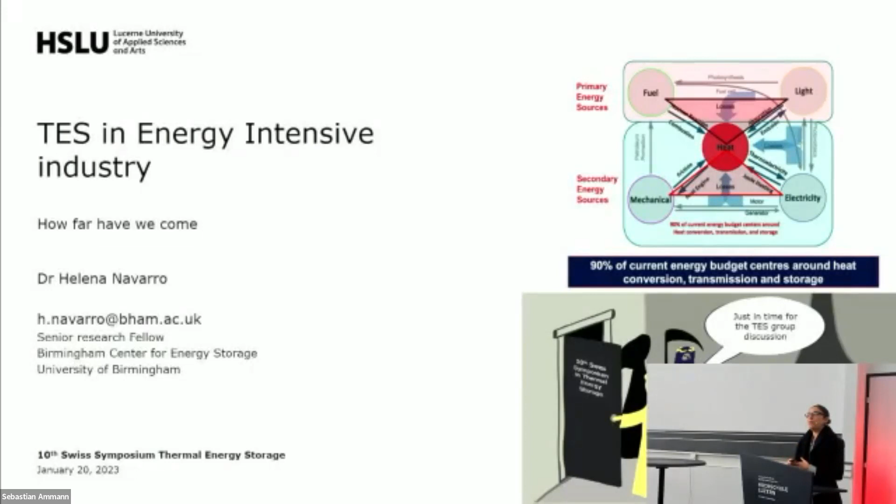Today I'm going to try to give an overview of the past, present, and future of thermal energy storage, but focusing on energy-intensive industries, so how we can move forward and help that industry to decarbonize. From my background in high-temperature ceramics, I tried to use the knowledge I gathered during my PhD and my experience working with industry, to see how we could help them tackle the challenges around their energy use.

One of the things they kept constantly saying is that industrial space is really expensive. Another thing is that when they designed the process, they have limited space to adapt to other technologies inside the site.

That made me move forward to look for more compact energy storage systems and how I could deploy them there. In the past, the main challenges were in latent heat and thermochemical storage, because I wanted even more compact thermal energy storage. The main challenges were, as mentioned before, cost and CapEx, and that's still an issue.

We need materials that compete with existing technologies. In case of latent energy storage, one of the main issues or challenges at that time was chemical stability, segregation, subcooling, and volume change. A huge effort has been done in these aspects, and some of the materials are now being commercialized, which I'll show you later.

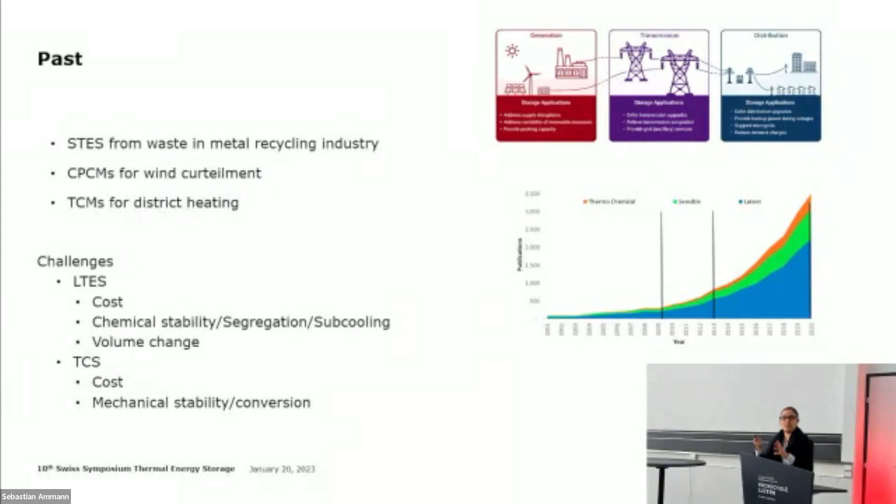What I've seen is that the share of thermochemical, latent, and sensible thermal energy storage is still under the same proportion in the number of publications. That shocked me a little bit when I was preparing these slides. I assume it's because of the different development stages of these technologies.

So the present: what we are doing in the Birmingham Center for Energy Storage, this is one thing I'm really involved in - how we can move from lab scale to industry, and which are the challenges.

Here is an example of a foundry industry. I have to say I've been visiting sites in the UK and they still work in a very traditional way. There's waste heat everywhere, and they still have heat needs everywhere, but they are not connecting those dots.

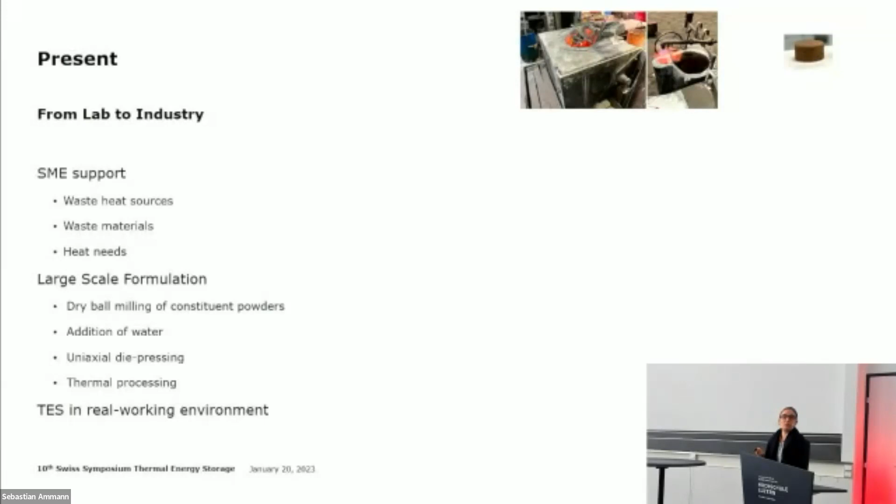In some cases, like in this steel industry, they have waste heat that we saw as an opportunity to use in the thermal energy storage material. The idea is how we can move from this, I think 13 millimeter pellet, to tons of material to store the heat and reuse it later.

So we designed for this specific application in this SME. Then we faced one of the first challenges, which is the manufacturing process. We have our material in the lab that comes from really pure raw materials with specific particle size, and then we had to move to tons of material - who can provide that?

Here we talk about critical materials - prices need to be stable. Is the material we're using competing with other applications? It took us months to reformulate the material because of the scaling up of the grinding, milling, pressing, and sintering. All of that was challenging.

But we managed to have CPCMs. In this specific case, we used molten salts and designed a cascade system. That's another challenge - how we are going to fill the material inside the tank, and then how we are going to move it into the site. The piping and connection was done outside the company.

And at the end, that's the prototype - around, I think, 1 ton of material. So we've come through a path that helped us understand the main challenges we're going to face when we want to deploy this technology in industry.

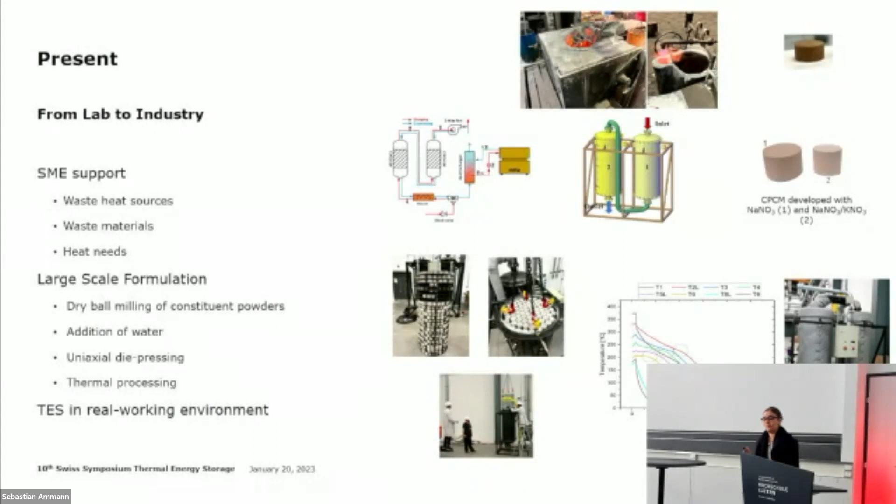For the future, everyone knows we want full electrification, we want 100% renewables. And in that case, heat is a huge contribution to that pie. Thermal energy storage is going to play a huge role, or we need to make it play a huge role because of its benefits.

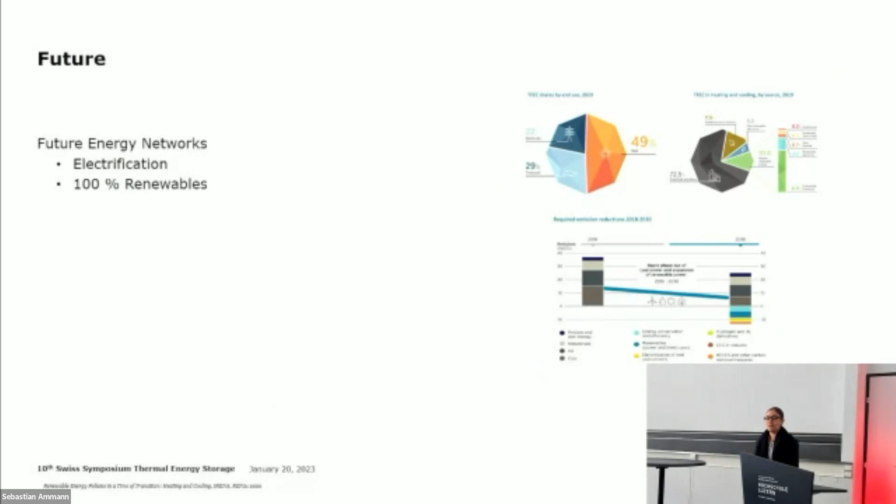You've always seen the challenges of these technologies, but I want to highlight that thermal energy storage is generally a decentralized system that's going to cause a disruption on the current energy networks. There's still a lack of policies for heating and cooling that would help us implement or speed up this change.

Also, I have to say that thermal energy storage can work in a wide temperature range, from minus degrees up to 1000 plus degrees Celsius.

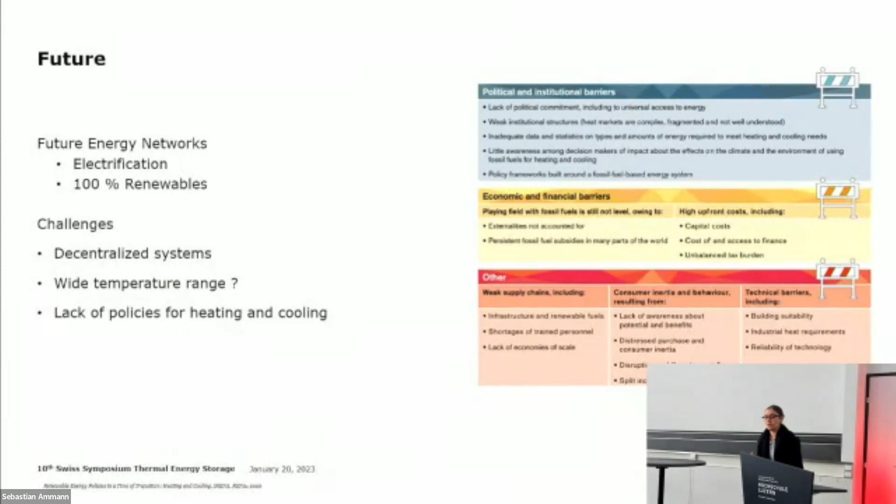But this advantage and these opportunities also make it really application oriented. So we need to foresee thermal energy storage in a more compact, modular way, so we can apply it in different temperature ranges, just slightly modifying designs to apply in different industries and needs. My vision on how we could help the research community and companies deploy thermal energy storage is to stop thinking in a top-down and bottom-up approach separately—materials on one side, systems on one side, design components and manufacturing on another. We need a multidisciplinary approach to speed up thermal energy storage development, because we need this technology ready, and we need contributions from other fields, not just materials.

So I think that's maybe a little bit more than 5 minutes, sorry about that. So, looking forward to the question and discussion. Thank you, thank you very much, Helena.

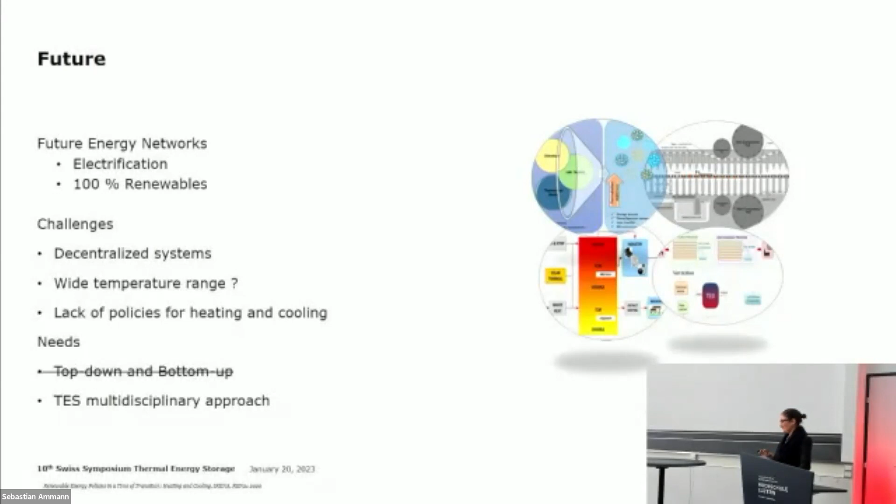Okay, so now we will continue with Alexis, who will talk to us about the importance of demonstrating new thermal energy storage technologies under application conditions. Yeah, thank you everyone for joining this session.

And so yeah, it's all about demonstration, right? We heard this earlier, pilots, demonstration. So therefore the title is about this in office buildings. And you see a bit in the background there behind me, the pilot itself. But why do we do that? What is the real motivation? Why do we get up in the morning and do that?

We all know the reasons: electrification, growth in fluctuating energy sources, more intermittent renewable energies, more grid constraints. Some people cannot develop the industry they want on the scale they want because they don't have access to enough power. It could also be that thermal loads are increasing—we see more and more call for cooling loads, and the world will just continue to increase beyond the need for heating.

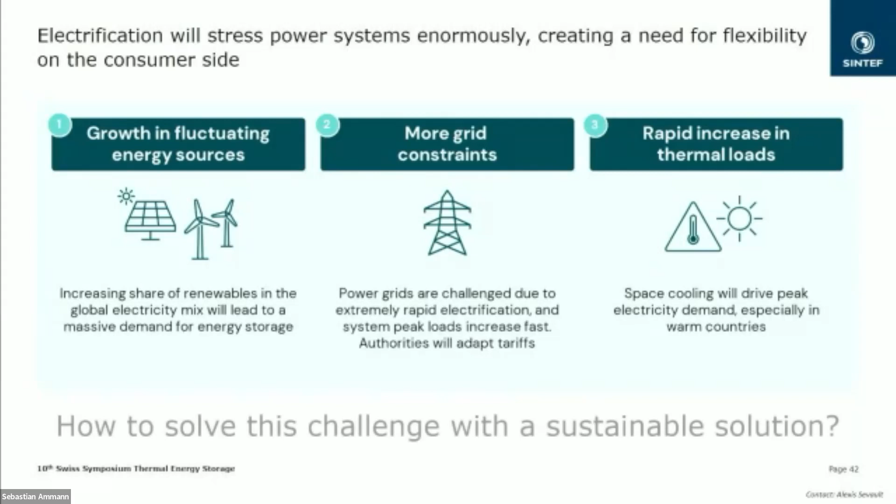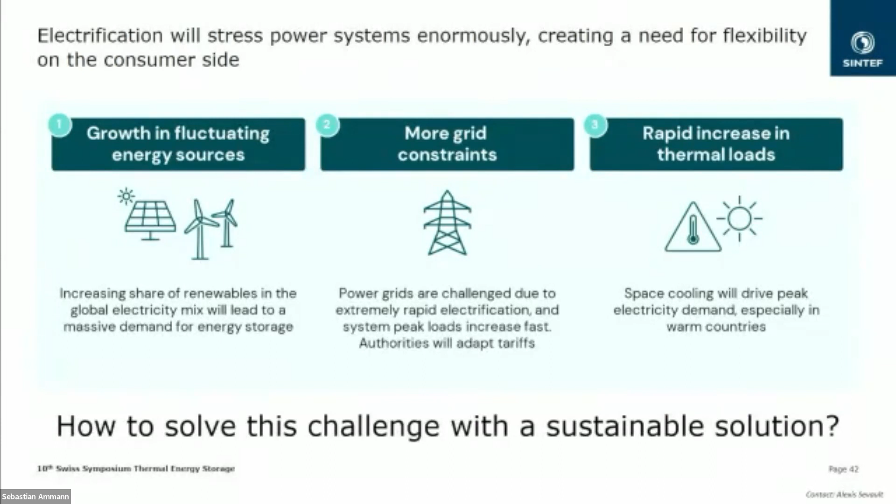So how do we solve that? Most people would go for the cheapest and most available solutions. But as researchers, our role is to look at these two aspects, of course, but also to make sure we have a sustainable solution. I think that's what really drives us in this development—how to come up with cheap and available, but also sustainable solutions, so that we don't put more renewable energy into a storage solution that isn't renewable behind it, creating another problem for the future.

So in that respect, we came up with that big box in a building—it's a zero emission building, so we wanted to go with the philosophy of zero emission storage too. It's not exactly zero emission storage, but we are converging towards that. We used 3 tons of bio-based wax PCM melting at 37 degrees, and it fitted quite well with the low temperature heating system in that building.

That provides about 200 kilowatt hours of heat storage capacity. If we were to put a hot water tank, that would have used 4 times more volume—a very large tank that either you put outside and have a lot of heat losses, or you don't have space for in a zero emission building. Each square meter costs a lot in terms of CO2 footprint, so that was really important there.

We combine it with a heat pump and district heating to charge, and we can discharge it back to the heat pump on the return temperature to support it in case of high heating demand. We can also discharge directly to the building as a heat source, where we don't run the heat pump then. It's a way to relieve the power grid, for example when there's a peak need for heating across the whole city—at least this building doesn't add to that load. So in that way we do peak shaving that relieves the local network a lot.

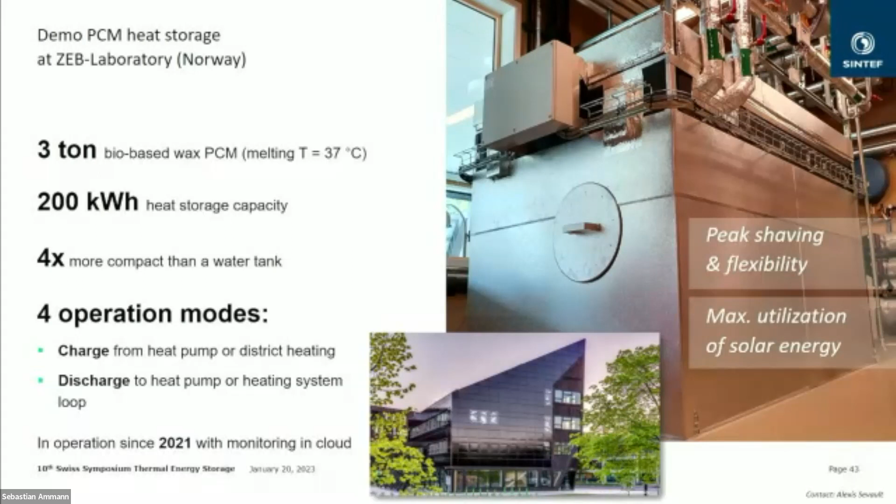It's been running for about 16 months now, so we've gathered a lot of data about it. I'm not going to go into details, but I have a few publications. We've learned a lot about how to make the next iteration even better, more effective, more compact, cheaper—so it's been quite interesting. And not least, the control of that type of unit: how you make it dynamic, how you use it as much as possible, to make as many cycles a year as possible.

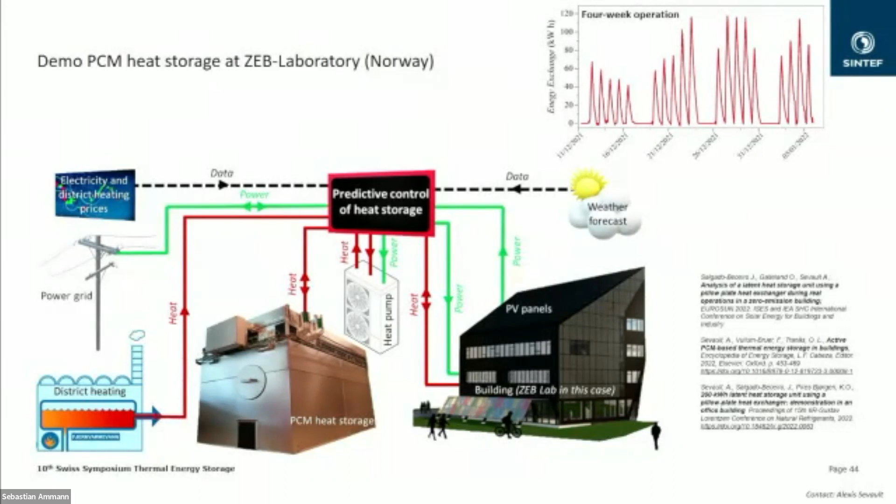That's how you decrease the payback time, going back to low capex and low operation cost. We've been working quite hard on it, and now we're implementing the model in the building. But that type of control is applicable also to industry, and it's a very hot topic. You have the hardware, but when you combine it with software, you get a low payback time, a short return on investment. That's how you get the business case going.

But the second step I described before is really operational condition, not a lab anymore. It's really a building, and that's where we started to pass the threshold somehow. We got a lot of people interested in the topic. When people come to this room, the stuff is as high as them, about 3 tons of PCM, a kind of big machine, in a technical room that's really big so they can walk in, turn around, and see it working. It's been there for a while, so they feel a lot more confidence in the technology. That's been very useful.

From that on, we have a few cases we want to demonstrate, some in buildings but also some in industry. Industry players are a bit more flexible when it comes to the development loop and testing new pilots, so it's very important for us to go through that. We're going to implement that, bigger than the first box of course. Our goal is to upscale production, decrease cost, and reach a much larger public for this kind of technology.

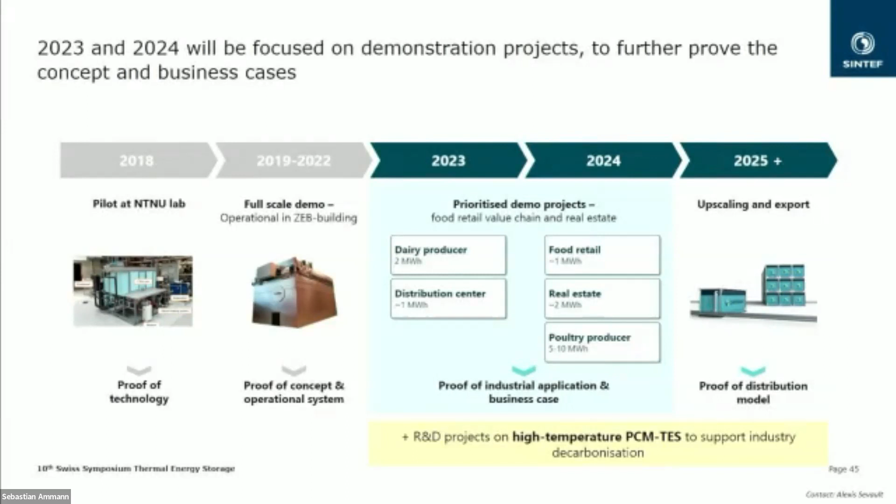Yeah, that was me. Thank you.

So when we started, we took on what we thought was quite a big challenge. We weren't really part of the thermal energy storage community at the beginning. We were just some people with a problem: how do I make my house, and the houses of all other people, work in the most autarkic way possible? Right at the beginning I thought that would all be about electricity—which shows how much I knew, nothing. Then I read my electricity bill and my gas bill, thought about kilowatt hours instead of pounds and pence, and arrived at a conclusion, which I know you all know: in a residential home it's about 80% thermal and 20% electrical. That was a complete revelation.

If you look at the world final energy consumption stats from the International Energy Agency, on a global basis it's 46% heating and cooling and 18% electricity. Yet in popular culture it's all about electricity. So that pushed us in the direction of saying we will solve something important in thermal. And actually, at the beginning, we also wanted to do interseasonal storage.

We came to the conclusion that it couldn't be economically done, and we couldn't fit it into buildings if we were doing it at individual buildings. I see from the presentations earlier that it can be economically done if you're doing it in the district heating network against an energy from waste plant, but you can't do it at individual buildings yet.

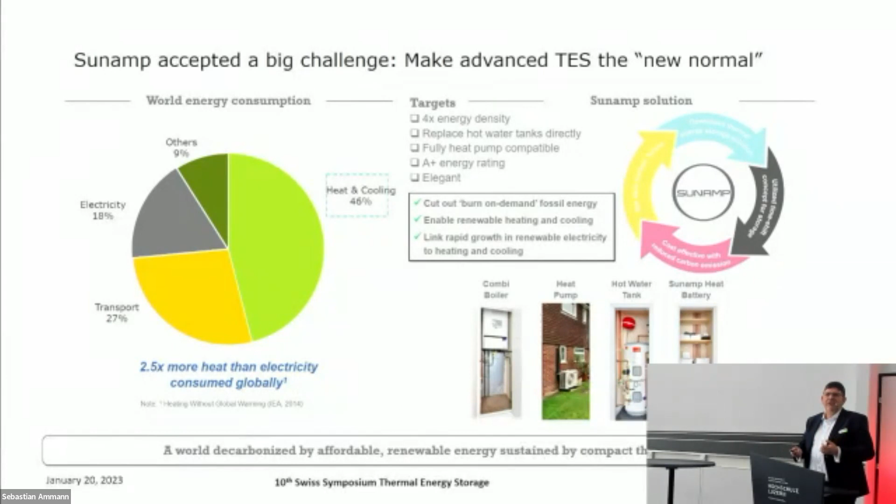All we had to do was stabilize the phase change material in those, sodium acetate trihydrate, make it work reliably, 10,000 plus cycles, make a box that would actually turn that into something that could directly replace a hot water cylinder, do it with extreme energy efficiency, A+ energy rating, and be heat pump compatible. And if we did all of that, we could help enable the transition. That's what we set out to do.

I'm not going to go through everything here, but like in so many fields, the people who look like pioneers are actually standing on the shoulders of pioneers who went before them. In our case, we go back to Maria Telkes in the 1940s in Massachusetts, making the first interseasonal solar thermal house - a storage recharged by solar thermal that could last up to 10 days to deal with troughs in solar generation. That would have broken out into the world and become huge if the chemistry had been stable.

So what we discovered very early in thinking about this was that we needed a chemistry partner we could reliably work with. We worked with Professor Colin Pulham - maybe you can stand up for a second - and Dr. David Oliver at the University of Edinburgh. From there, we were able to perfect our chemistry, and that got us into the ability to then move the technology forwards with Dr. Maurizio Zaglio over here. We were able to actually make this work tangibly.

Then we moved from there to how do we ramp this in the market. That's all about raising money and deployment and sales and doing all the things which I think fall in the socio-political, which is why I've put that green badge on, and I'm going to the socio-political section later. It's about persuading people - in a way about giving them permission to buy the thing that they actually want to buy because they know they want to make a difference.

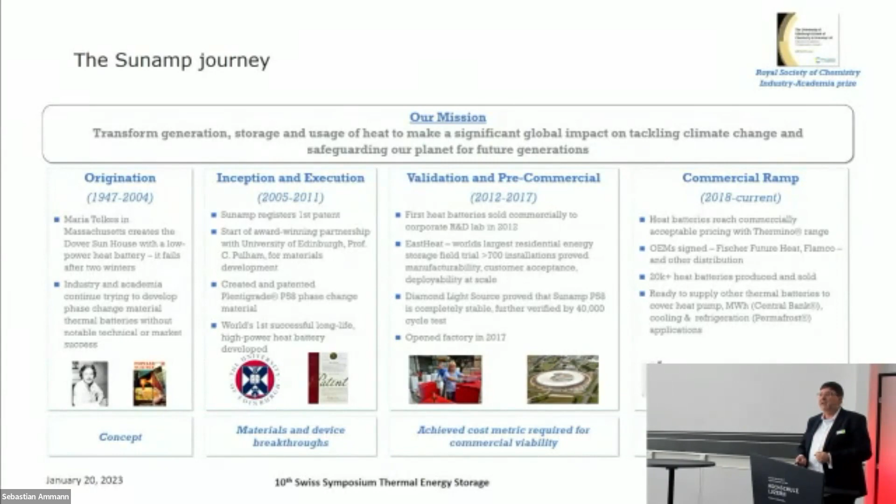Some of that mission is about making it low cost, and we've got into a range where we can compete with existing solutions. That's really important with a box. You can see that in the exhibition, which is about 4 times smaller than the hot water tank it replaces - again, that 4 times number that comes up.

In the last 10 years we've deployed about 20,000 heat batteries. So it's quite a big number for this industry so far, but we're not really very satisfied with that. We want to be making millions of heat batteries because that's what it takes to move the world.

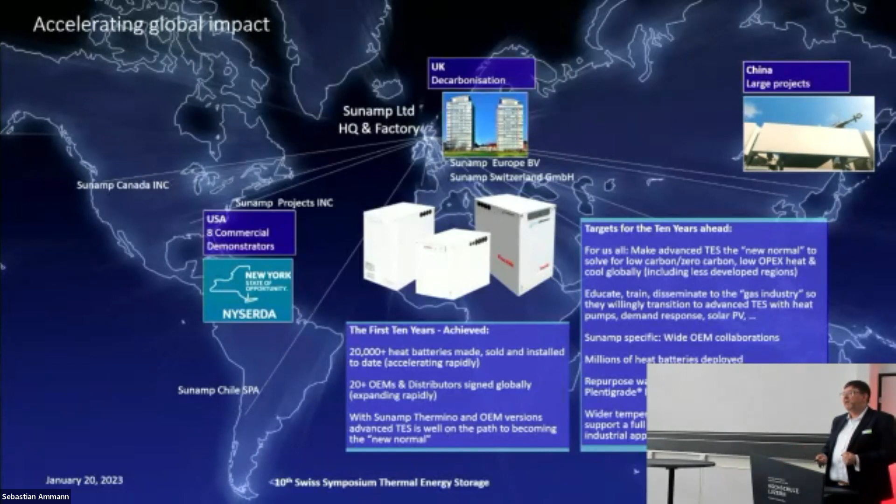And to do that, we'll do it in partnership. We already signed up a lot of OEMs and distributors. We will partner all over the world in multiple different ways, and in many cases we'll partner with people in this room, right? Because we're not going to invent every technology that we need, and we're not going to have every solution in our own hands. We would be very delighted to work with anybody and everybody in partnership.

Yeah, we see the same requirements for wide temperature ranges. We see the same requirements for industrial. We see the same requirements for cooling. We have some brands lined up for that.

Permafrost for cooling, Central Bank for large scale formats, which we haven't built yet. And in fact, maybe we'll build some of these with people here. But our Sunamp Thermino product today is already breaking open the market in a serious way, and we're really pleased to be doing that.

We all collectively need to do something very important. We need to educate, train, and disseminate to the gas industry. We need to give them the tools to willingly transition to something that isn't gas. It's too easy for them today to just go and buy a combi boiler and stick it on the wall. We need to give them the easy path, or the educated path, to do something different. And I would make that a challenge for everyone. Thanks.

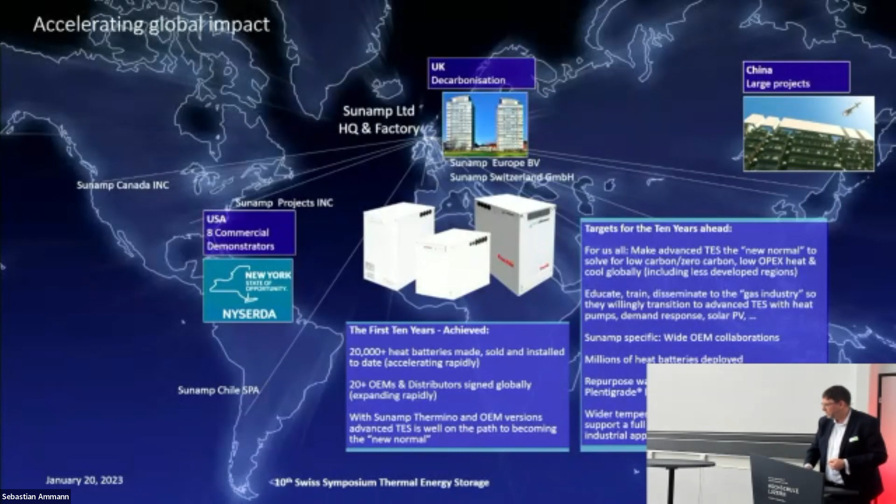I hope I don't disappoint you. I'm a bad prophet, not very good in prophecy. I'm also not very good in calculating CapEx, unfortunately. So what I have to offer you is a personal journey in thermochemical materials. But I think the journey has aspects which also trigger discussion in the field, and that's what I want to do.

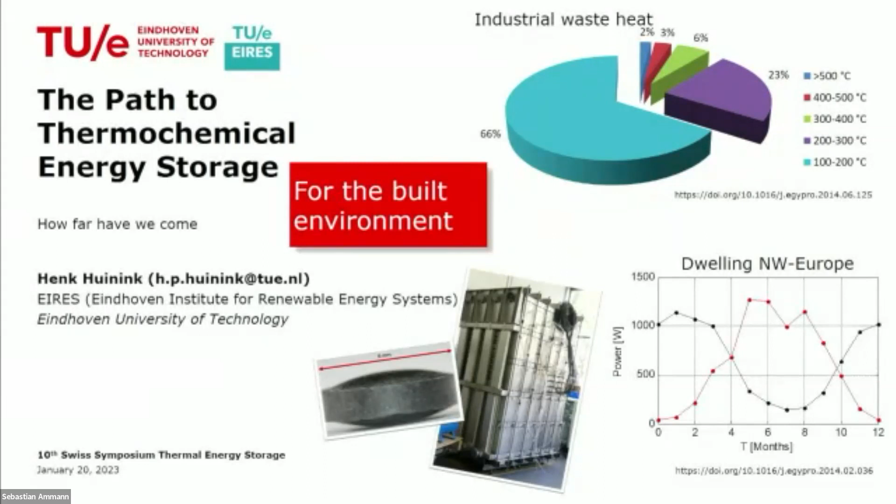I noticed, and I'm a stupid physicist, of course, so I really had to learn a lot. So for me, I think one of the key lessons was: okay, I know that we have this energy transition and that compact materials for long-term storage could play an important role. I know that we need stable materials for that, and I know that we need fundamental understanding, and there I could play my own role. However, I had to learn that I should embed myself, and that's why I'm also here, in this whole technology chain or knowledge chain, because they put the real questions to me, which are let's say, physical questions.

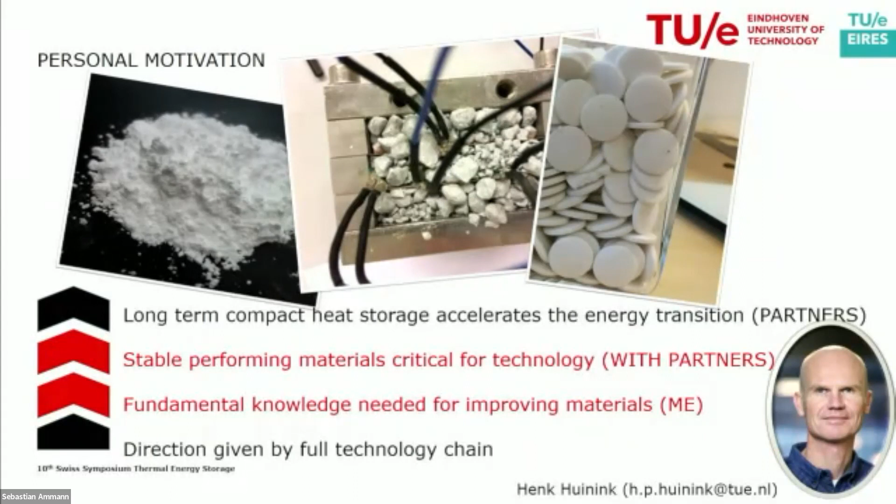Where are we? I try to bring in figures. So if you think about thermochemicals, the main advantage is that you can store heat for a very long time, simply because you separate two compounds. That's the major advantage. The other advantage could be, but I say could be, is the energy density.

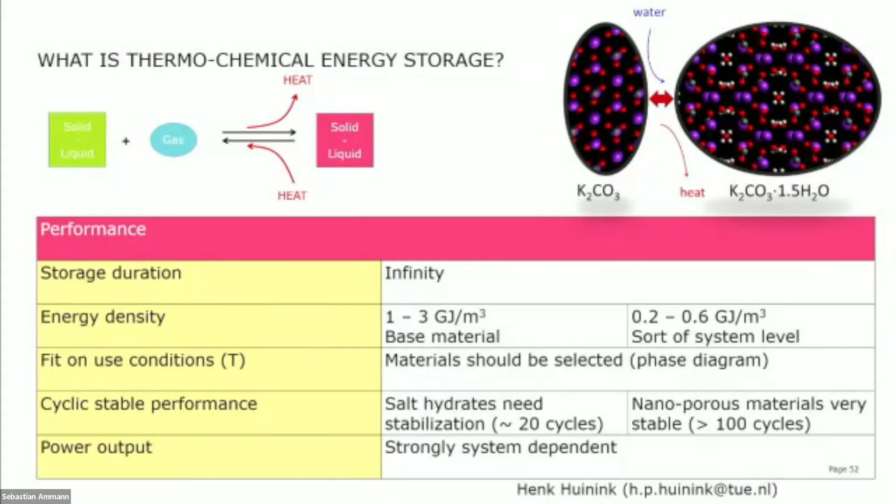Right, few examples to illustrate that a bit. I was involved in a project... oh no, I ruined it... oh now it should work again. I was involved in a project which was working with vacuum systems, pure water vapor.

What is nice? Okay, it's passive transport, you don't have to do a lot. But what is then the problem, and that is a challenge: heat getting out of that. So you have an intimate contact between a heat exchanger and a material, which causes a lot of problems and a lot of challenges there.

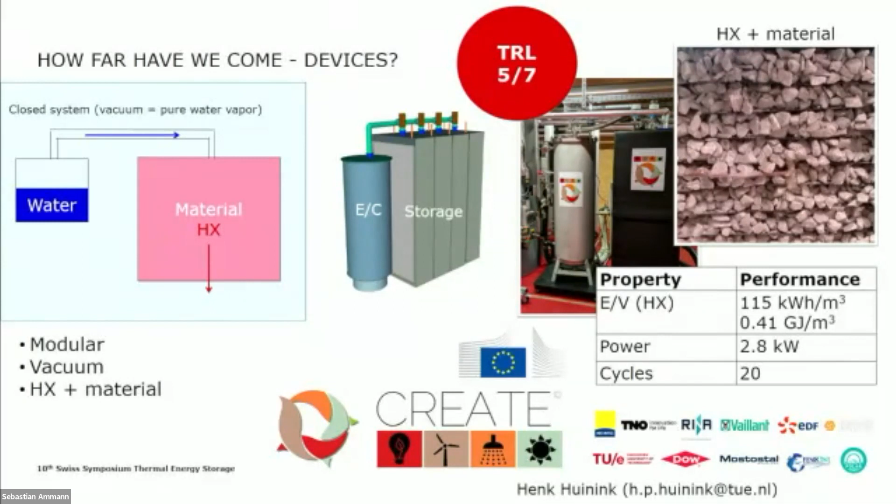Other example from an atmospheric system here, also working towards demonstration right now. What is there the major problem? Not so much the heat exchanger. What is here the problem is get the flow through the material. So cyclic stability becomes even more critical.

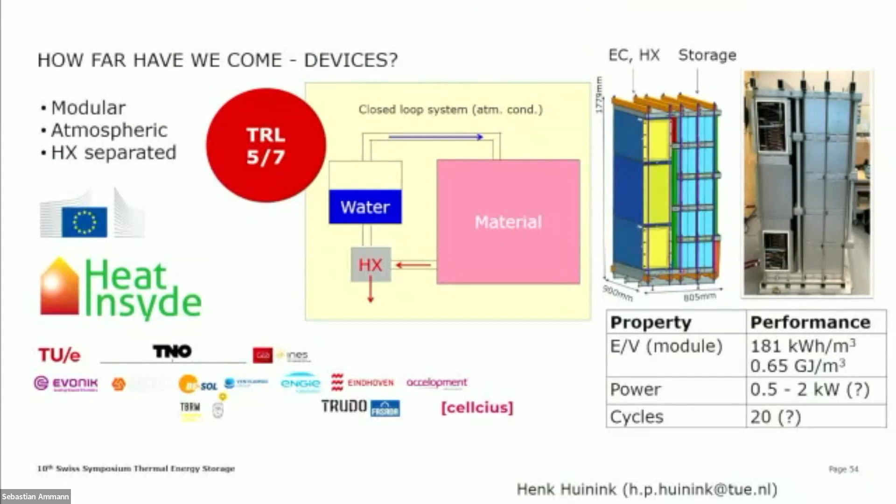And then finally, on the material level, which is basically my own job generally, I think we understand now how to play with power, reaction kinetics. What I still see as a major thing is the stability, because if you improve stability, you can do more cycles, then the costs per unit energy go down, and that's what you need.

And finally, the link to industrial scalable and sustainable materials production, which is often forgotten in this field. So you can play with nice materials, but if they are scarce, if they are expensive, don't work with it. And this is for now. Thank you very much.

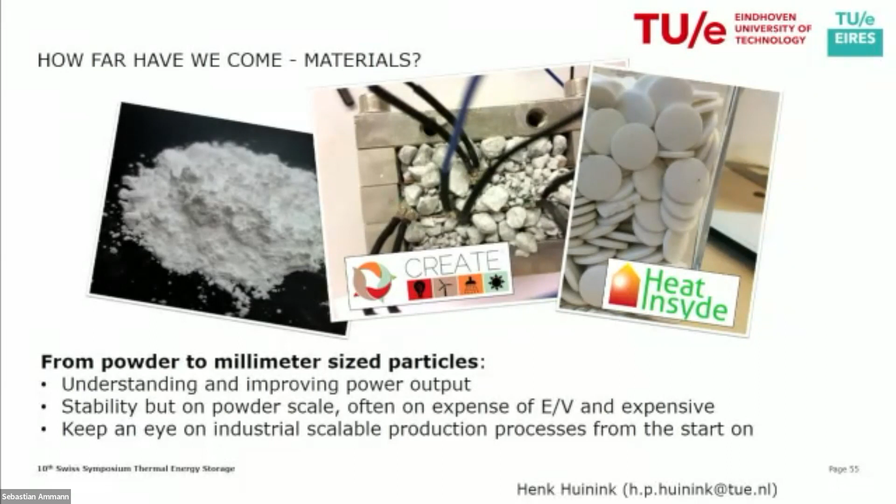Imagining a little bit the future of latent and thermochemical storage technologies together. I'd like to start with the first question for you, Andrew. You mentioned 20,000 units already sold and a future of many more thousands being sold in the next years. So what is your vision about the role of latent heat storage in the energy future of Europe and generally of the world? Do we target having latent storage in every building, or what would be your vision?

Good question. I think any building with an independent energy system, meaning it's in the building only, is probably going to have a latent heat store. Or maybe a thermochemical store. I mean, I love thermochemistry, I just can never get it to work. Let's be honest.

We think we've got to the point where we've cracked the problems of stability, price, affordable manufacture, scalability of raw materials. That means that in the next years, there will stop being a reason to make individual home water tanks, and there'll be every reason to make phase change material stores, either the way we make them or some other way. From our side, we want to partner with people that have plants they'll be shuttering and instead help them make heat batteries. Let's be completely honest, we like partnership. So I think we see in that area, everything go PCM over 10 years.